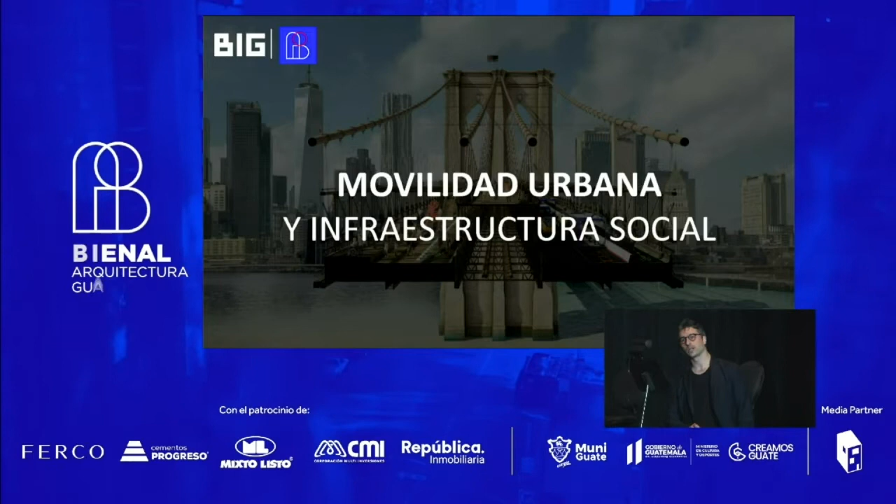My name is Jeremy Siegel. I'm with Big out of New York City, and it's really my pleasure to be here. There's nothing I love more than experiencing and learning about new cities, so it's wonderful to be here in Guatemala City. I had some time this afternoon to spend with the team from the Alcaldía to learn about some of the thinking and initiatives going on here, which are quite exciting.

I'm very happy to present today on urban mobility, which is a theme that's very near and dear to my heart and to Big's heart. The more I look at cities, the more I go to cities that work and cities that don't, it becomes clear that mobility is both a key driver of success and a key indicator of success or lack thereof. Reducing the amount of time we spend in cars is good for economies, good for the environment, and good for people. So I am pleased this evening to share a series of projects which address urban mobility, either as a focus or as part of their agendas.

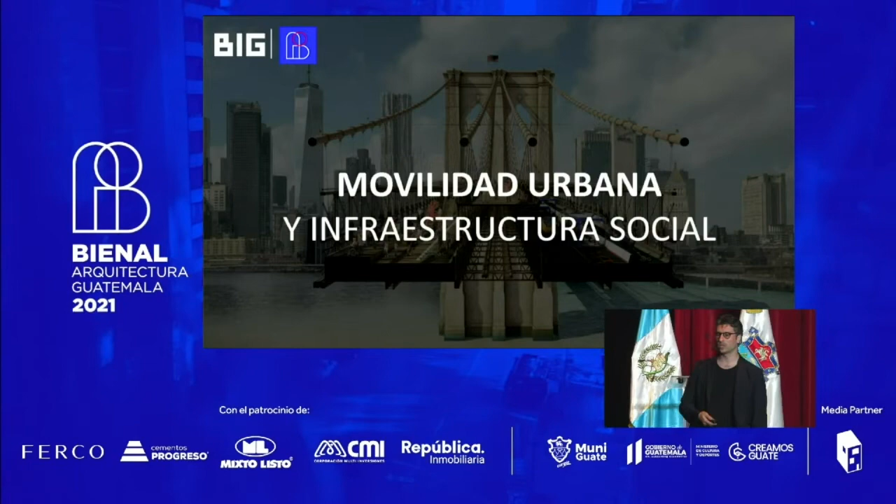I'll also talk about this idea of social infrastructure, which is a way in which we approach many of our projects around the world.

We have a dedicated and passionate workforce, and we like to experiment. We really like to push the boundaries with every project and try to explore what hasn't been done yet.

Recently we've become more of a multidisciplinary office, what we call the Big Leap. So we are architects, but also landscape designers, engineers, urban planners, and even product designers. We work at a whole range of scales, from light bulbs and sofas to parks and buildings to city and regional plans.

Just a little introduction to Big to give you a sense of where we come from and the kind of experience that has informed our more recent projects.

The Harbor Bath was one of our first projects in Copenhagen, built on the occasion of the harbor becoming so clean that you could swim in it. This has become a major attraction in the center of Copenhagen.

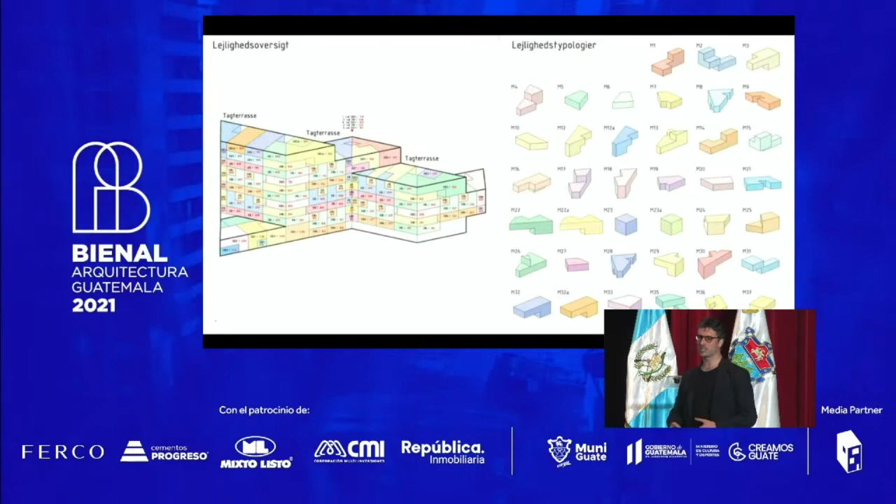Early housing projects like the VM House and the Mountain next door tested the boundaries of individuality and customization within a building, using standard components but trying to generate diversity and community in a surprising way.

The 8 House, another early project, looked at how to create community in a high-density mixed-use development. We wrapped the street and the countryside into the building itself, creating a three-dimensional village where many apartments have their own front door, with a sense of community and neighborhood that's unique and hard to find in those kinds of settings.

Some other experiments with housing: the Urban Rigger, looking at modular prefabrication to produce affordable housing. This is student housing being built in Copenhagen on the harbor, also creating community within the building with a central courtyard.

There's a series of 3 one-bedrooms at the ground floor of each of these and 9 studios up top. The studios are about 30 square meters apiece and the one-bedrooms are about 60. Again, with quite modest effort, creating a lot of quality and value. We're also looking at mass production—these are being built in Poland and then tugged into place in Copenhagen.

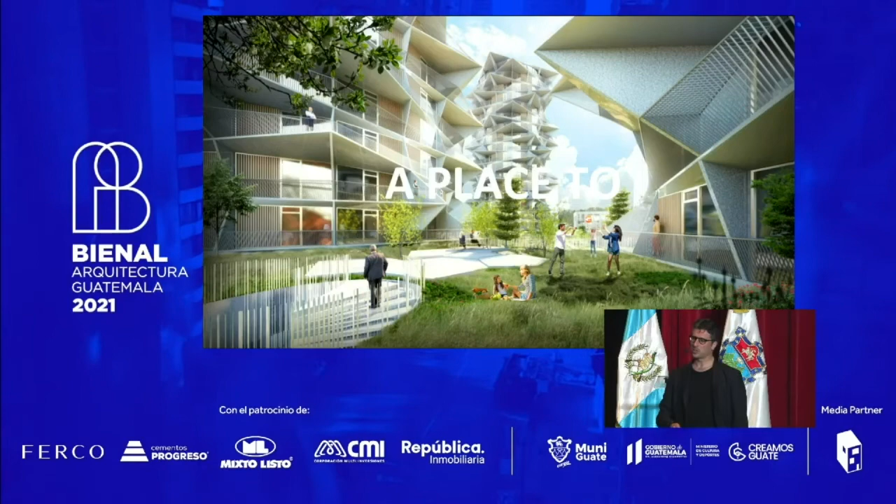Another experiment, a place in Denmark, looking at prefabricated modular cores and slabs with unitized balconies and units attached to those cores that create some pretty interesting architectural effects

and a feeling of community within. Superkilen is one of our earlier planning and public space projects, working in a neighborhood that's actually the most diverse in Copenhagen, with over 60 nationalities represented.

So rather than design the whole park ourselves, we crowdsourced the design out to the community. We created a platform whereby community members could suggest pieces of urban furniture from the places they were originally from. They were all entered online, and eventually the winners were ordered and placed in the park.

So we have fountains from Morocco, a sound system from Jamaica, a boxing ring from Thailand, a bus stop from Kazakhstan, a plaything from Japan, benches from Mexico, and so on—community engagement taken to an extreme, you could say.

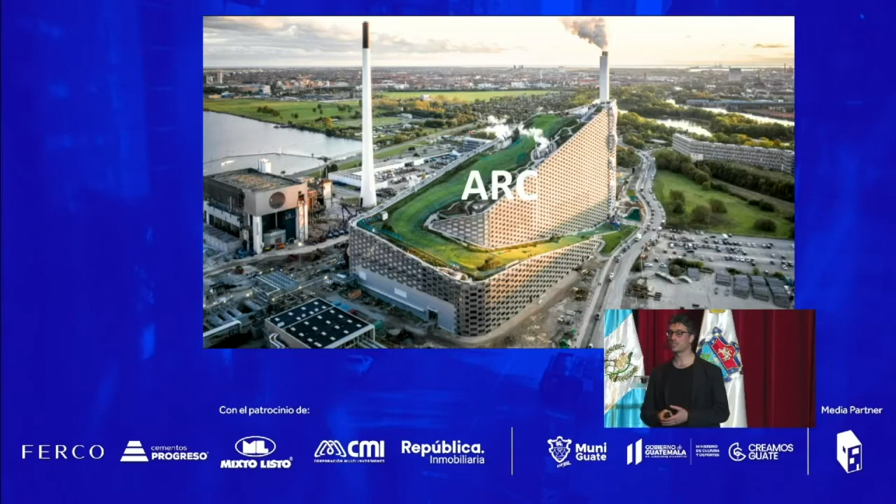And then finally, with the Amager Resource Center in Copenhagen, we won the competition to beautify a waste-to-energy plant, which processes all of Copenhagen's waste and turns it into energy with a byproduct of some steam and CO2.

But rather than just create a pretty facade, we noted that this structure would be the tallest structure in Copenhagen, a place that has a lot of snow but no mountains. So we proposed a ski slope on top of it, and won.

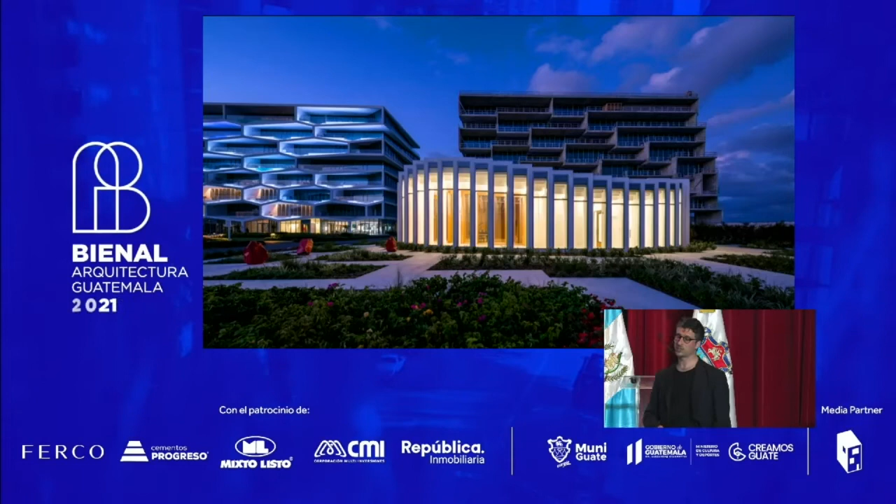We've also started doing more work in Central and South America. A few of our first projects: a residential quarter and recording studio in the Bahamas, where I think Drake recorded his latest album or parts of it, and this is a residence in Mexico.

A few high-rise residential projects in Quito, Ecuador, that we're quite excited about. This one, IQON, is the first one that's going to be built. It's a series of balconies that each have a tree and a space for planting, and you can see the modules of the facade adapt to accommodate the soil depth for those trees.

This is also nearing completion. We're really excited about this one.

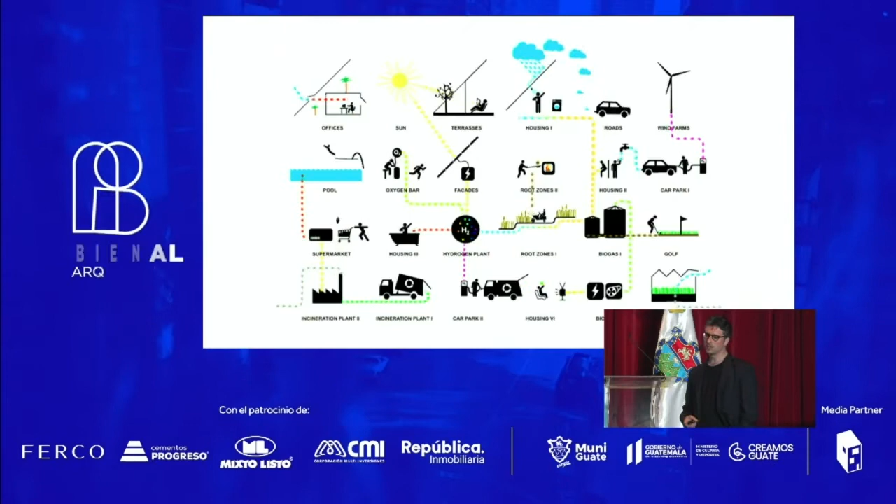Our approach to infrastructure and planning is embedded in our approach to buildings, which is, I think, what we're always trying to do: add additional agendas to the agenda of a given brief or project, and try to create projects and investments that accomplish multiple goals and think comprehensively across the systems of the city.

One of the first large-scale examples of this is a project I've been working on for almost a decade, about 8 years. The Big U in New York City, where after Hurricane Sandy, a federal competition asked us to rethink our cities in light of storm surge and the increasing threats that cities on the eastern seaboard are facing.

So we focused on Lower Manhattan, an area that was dubbed South of Power just after the event. If you look at that area, you'll see that the original coastline was actually about 50% further inland. There's been a program of land reclamation over the last 400 years or so, started with the Dutch, continued by the British, and even continued a bit into the 20th century, where the landmass of the island has increased and economic activity has been able to concentrate around the harbor as a result, which has been great.

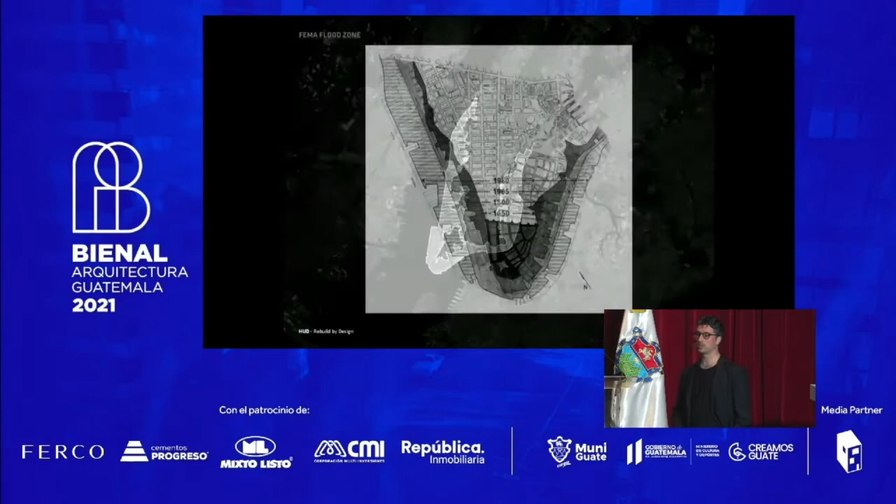But the downside is that all of that land has been built at a quite low elevation. So as we have more and more storms coming into New York Harbor, we're basically going to need to do something about it.

North of 57th and 42nd Streets, the topography is very high, so it's not an issue. So the need in Lower Manhattan is to build some form of an elevated edge to protect against future storm surges. Our approach was to say that if it's approached in a purely functional engineering way, we would create another kind of urban disaster, which would be the cutting off of the city from the waterfront.

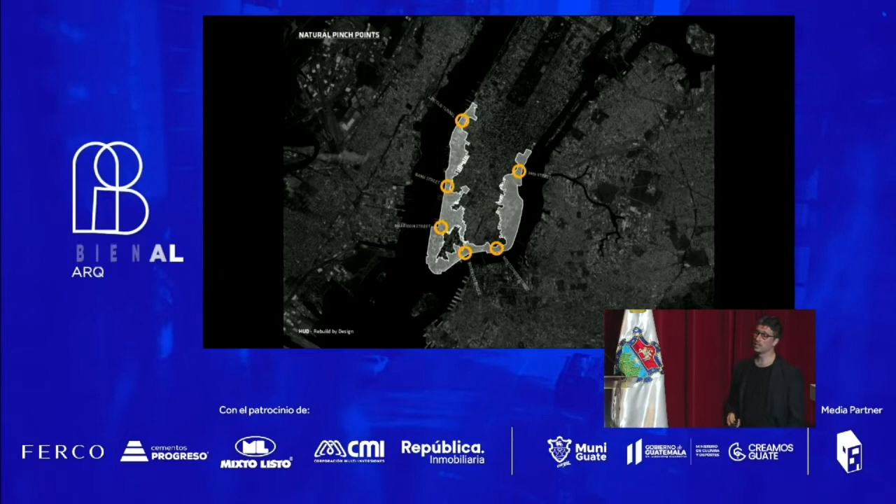So we looked to the High Line, which is a piece of social infrastructure, a train viaduct that was, after the fact, programmed as a park, and in quite a narrow footprint creates a great amenity for Chelsea. We were wondering how we could do this ourselves with the resiliency infrastructure in New York City, how we could work with the scale and also the diversity and variety of the communities that sit along this coastline, and how we can also work with the floodplain.

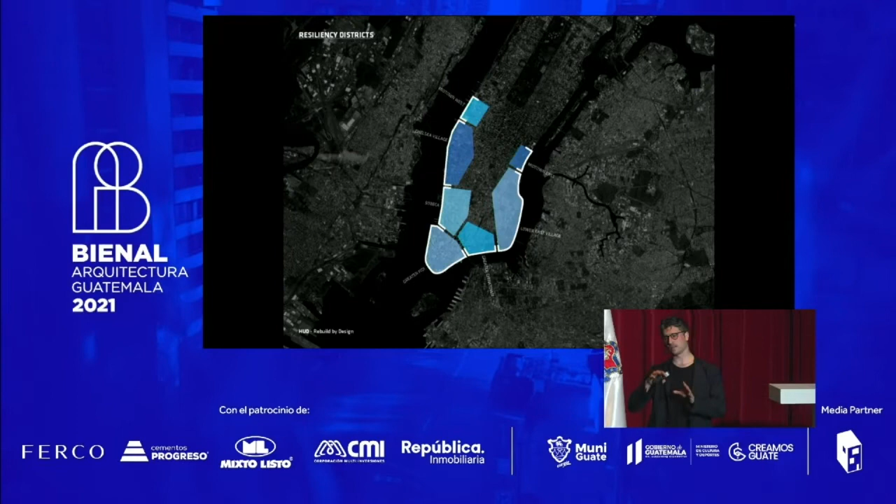The notion of doing 10 miles of continuous protection all in one go is daunting, difficult financially, difficult politically. So we realized quite early on that by breaking up the system of the big U into a series of little U's, we could start smaller and work our way around the island. Each of these compartments, as we call them, could be financed, administrated, and designed at the appropriate time with the appropriate stakeholders. That way we're doing two things: creating redundancy, so if one compartment were to fail, the system would still work overall, but also creating variety along this length, which is a real series of very diverse neighborhoods.

For those of you familiar with urban planning in New York City, we thought of this as a scenario where Robert Moses, the central planner of New York in the 20th century, and Jane Jacobs, his neighborhood activist nemesis who killed many of his projects, were to collaborate together on a project.

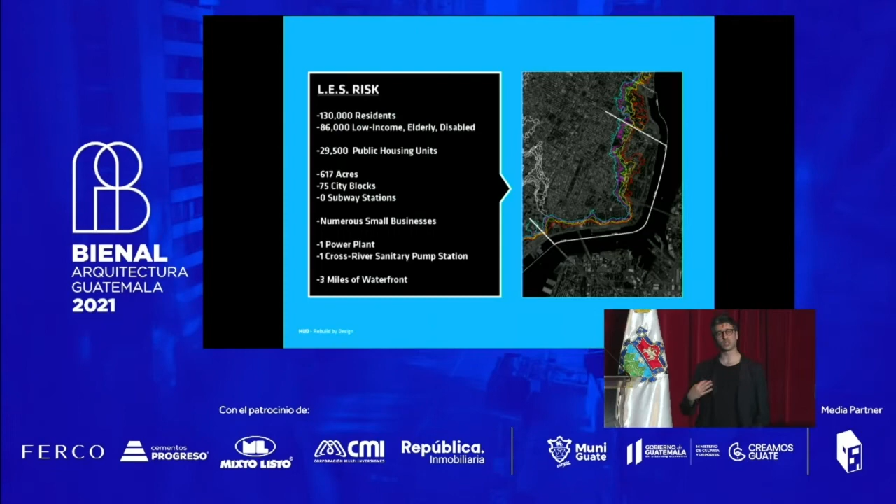To do that, for the Jane Jacobs part of it, we had to understand who was living along this coastline, what all the relevant stakeholders were, both on the nonprofit and community side, but also government, federal, state, and local, as well as the private sector and businesses. Through a series of briefings, meetings, and workshops, we met with everyone. We slowly started to zero in on the Lower East Side as a place to start. It's a place with a lot of social vulnerability, 130,000 residents, 86,000 of whom are low-income, elderly, or disabled, living in about 30,000 public housing units.

Working with local community groups, we began to craft a plan. One big innovation for us, since we were an independent entity, is we were able to approach the community with an openness and transparency that perhaps isn't so normal in New York City planning, where a lot of things are kept closer to the chest. So we made architectural models of all the various options for flood protection, from narrow footprint flood walls to programmed parks and even buried highways and more involved efforts. Over a series of workshops, we zeroed in on solutions for each part of the waterfront, and we found these to be a really great way of engaging with people.

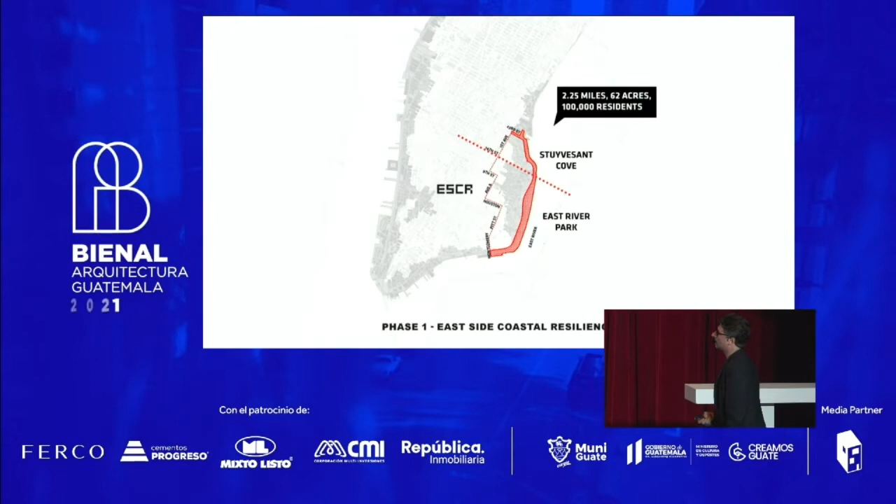After that whole effort, our project was awarded first place of $335 million to implement phase one. It's pretty rare that you get the governor, the senior senator, and the mayor all on one stage, so it was a great moment. Then we proceeded with the first phase, East Side Coastal Resiliency, which will be 62 acres and about $1.5 billion, about 8 years of construction — a sense of scale with respect to Central Park and the High Line.

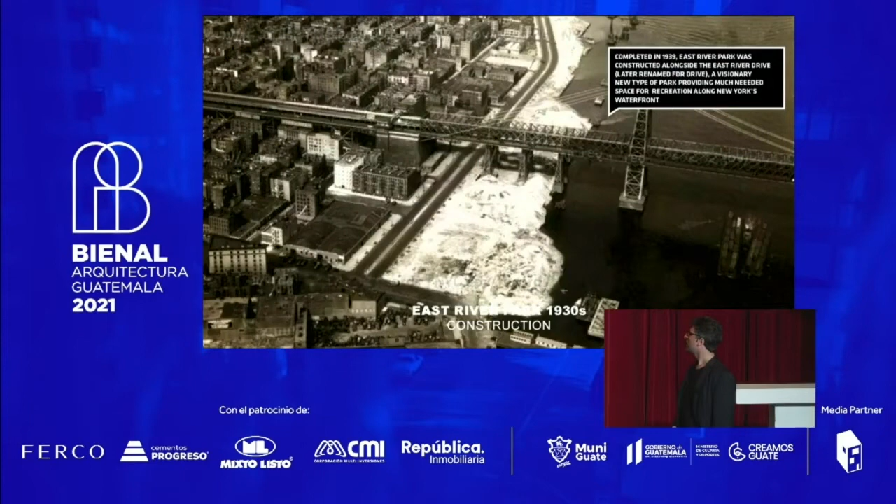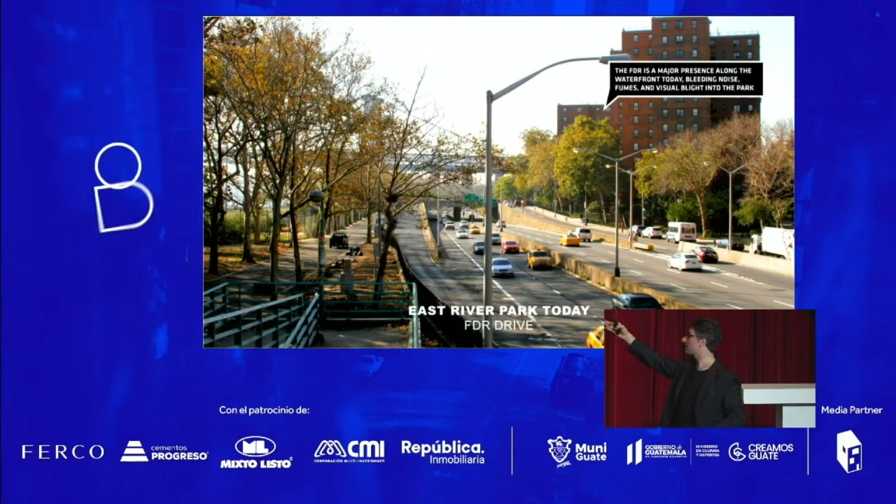Here's where urban mobility comes in. Lower East Side used to be a working waterfront with a series of piers and very dense tenements — one of the densest places in the entire country and maybe the world at the time. In the 1930s, an at-grade boulevard was created, and a park was created outboard by Robert Moses. In the 1950s, as car culture became the norm, the at-grade boulevard, which you could cross easily, was turned into an expressway. Today, that expressway cuts the neighborhood off from the waterfront, with only 5 points of access across about 2 miles. The bridges are the same ones originally built, so substandard crossings. And the Manhattan Greenway here can use some work — this is one of the major north-south arteries.

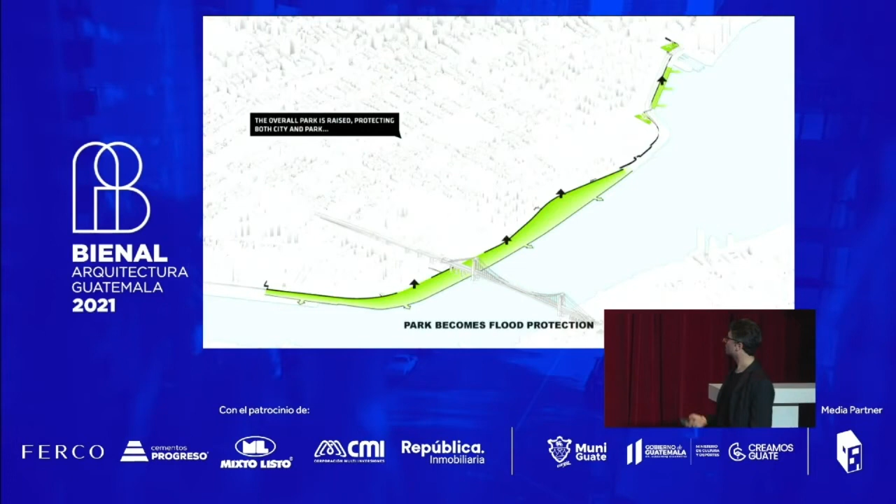You can get a sense of scale there for how deep it goes in. So the flood protection runs along this length, then the park is elevated to meet that elevation.

A series of key programs are preserved and lifted up and rebuilt in place, and then a series of passive recreation areas are placed between those. New bridges, and this is a really key feature, new pedestrian bridges will bridge across the FDR Drive into the neighborhood, so a seamless circulation system is created.

The Manhattan Greenway is enhanced and gives access to a number of programmed areas, which we worked with the community to identify what made sense where.

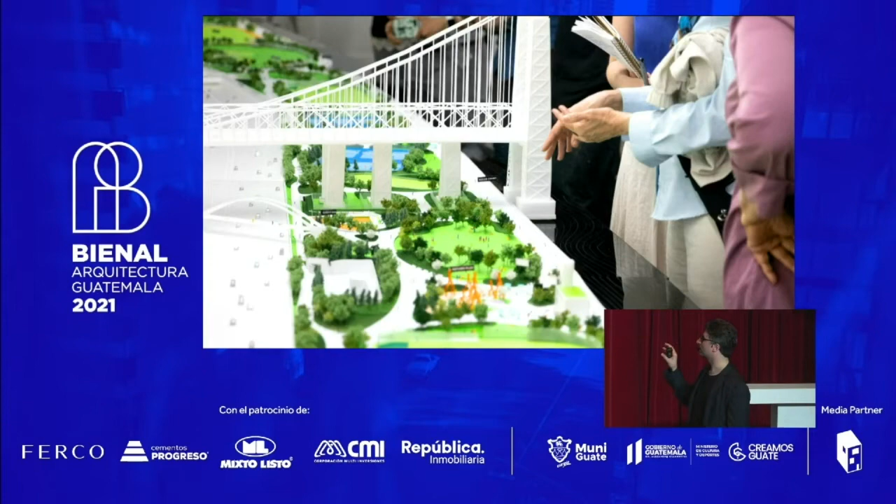So this gives you a sense of what will be built. This is a bridge at Delancey Street, framing into the park. Three new bridges over the FDR, and a series of amenities along the length.

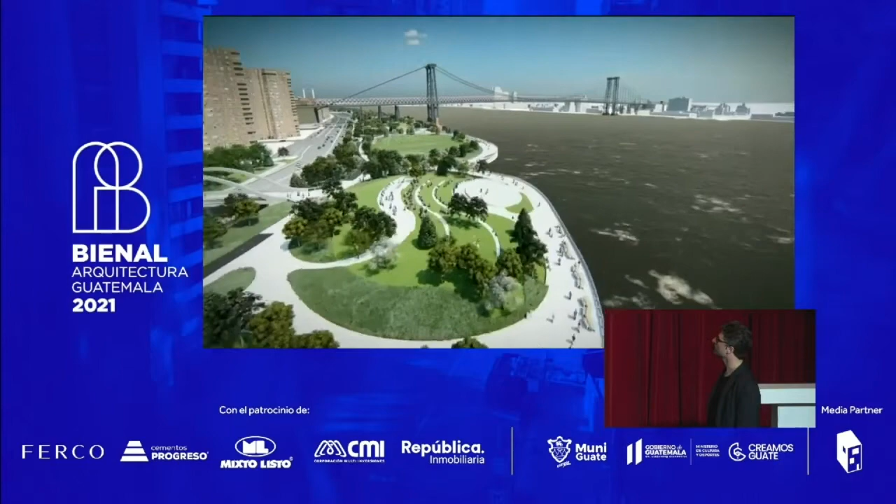So this gives you a little bit of a 3-dimensional sense of the project. You can see the flood wall there towards the back, the Greenway, one of the first bridges, and it's sort of changing along its length and accommodating various activities.

This is under construction. This is the first piece of the flood wall, built in situ in cast concrete. You can see a guy there for scale. So this is striated at every foot.

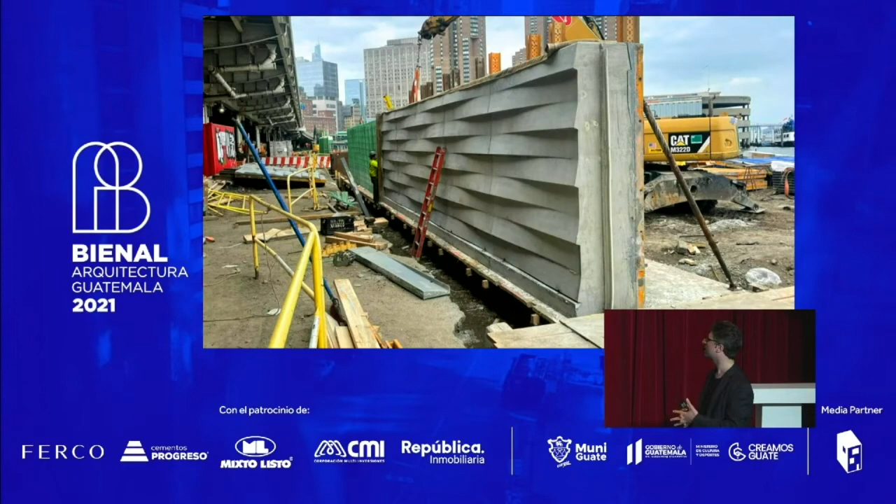And we worked really hard to find an approach where we could have a concrete wall that was inspectable by the relevant authorities, but that had a sense of scale and playfulness to it.

This is BQ Park in Brooklyn, where another Robert Moses project, the BQE Triple Cantilever, was built in the 1950s. Kind of an amazing feat of engineering that has a wonderful park on top of it. You can see the promenade up there.

But the lower portions of it are corroding. The steel reinforcement is corroding. And it's very dire — by 2026, the whole thing could collapse, if not sooner.

The problem is that there's a much-loved park on top of it. This is one of my neighborhood parks, the Brooklyn Heights Promenade. And the city of New York, their original proposal for this area was to build a 6-lane highway.

A temporary 6-lane highway through this park, working only within their own right-of-way, their own jurisdiction, to do this. For them, that was a benefit.

So we looked at the historic urban fabric of Brooklyn and the original condition where there was a more seamless interlacing of city and river. And we also took a look at the real physical conditions that we have on site.

Looking at it, I would say, more as designers than as planners, in the sense that we tend not to see jurisdictional boundaries so much. So what we realized was that the back of the park, with its berm and parking, is really there as a buffer for all of the noise and visual pollution of the highway.

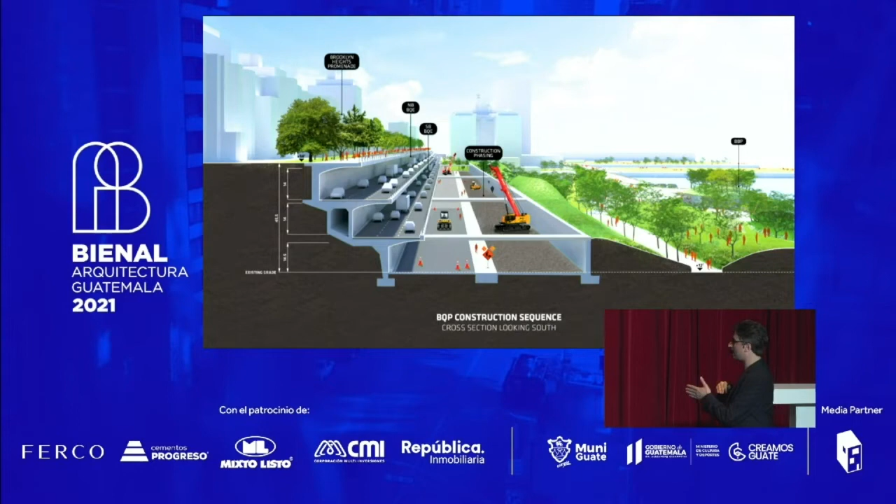And that if the city, which owned everything up until the sidewalk, could coordinate with the state, which controlled the park, a joint solution could be made where the highway would actually be built at ground level using a piece of the park. But eventually, after construction — and you could also construct the highway while the existing highway was operating — additional park could be placed on top, and you would get a net gain of about 12 acres of parkland.

There was a lot of engineering and traffic planning that had to go into this — understanding how the phasing would work, how various lanes would be shut down, switched over, and eventually capped over. This was actually a pro bono effort, so we worked with a team of engineers from New York who were also passionate about this.

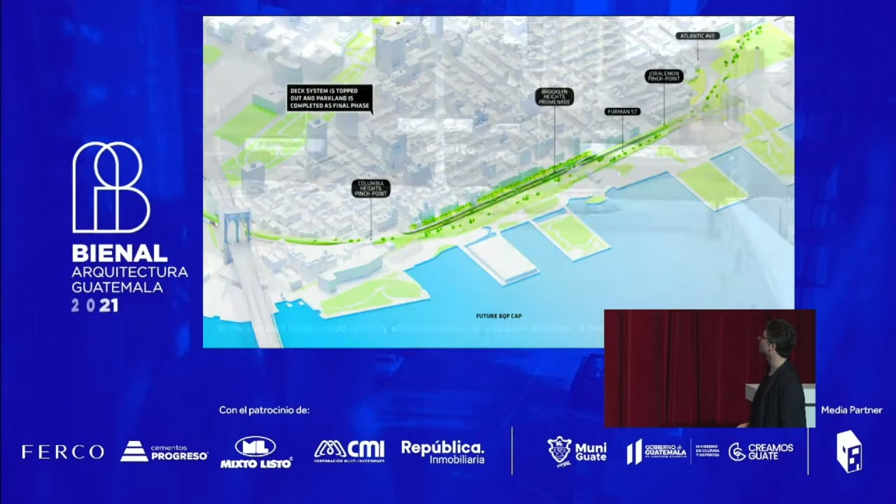And we also worked with the landscape designers of Brooklyn Bridge Park to imagine what the park would be like with the highway covered and capped. So, a much smoother connection up to the neighborhood, a much smoother connection down to the park from the neighborhood, additional space for programming, and in some places, really radical changes.

So in this case, at this point, the highway would actually be below ground. So you would have just a complete transformation of this access way to the park.

It wasn't enough just to put the big idea out there. In order to prove out the idea, we had to address each and every one of these issues, which were brought up by all the various naysayers about the project.

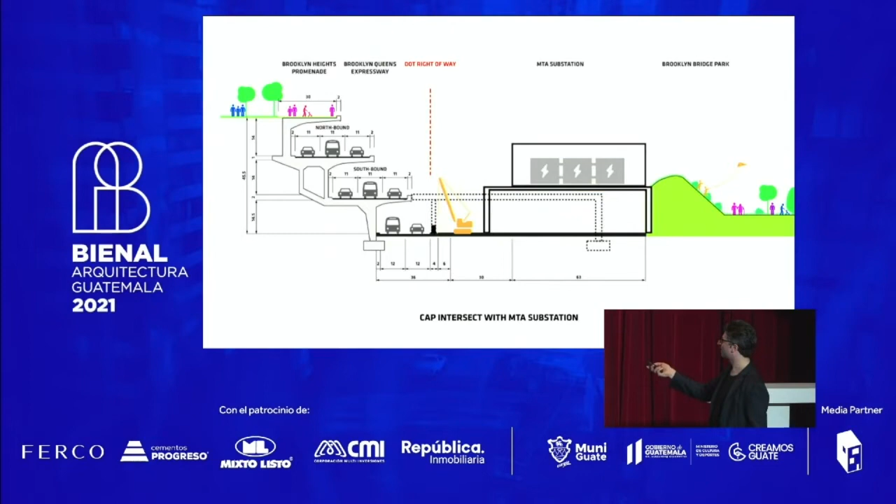We met with the MTA and figured out how to deal with the nitty-gritty of the substations, meeting with their chief electrical engineers. We figured out a way to build a temporary, or basically build a new electrical substation above the existing one, and then switch one offline while the other is turning on, and integrate it into the park.

Also looking at complex engineering conditions in these areas. So this is all to say that the big idea is great, but we also take a lot of time to go in depth and understand the technical parameters of the solutions we're proposing.

And of course, engagement again, building off the experience from the Big U, is something we continued here to make sure we're getting buy-in. So we got a number of audiences with the mayor's expert panel formed to look at this problem, and presented at this epic town hall of about 1,200 people in Brooklyn Heights.

After about a year of work, City Council endorsed our proposal as the most feasible and also cheapest solution. So we're now waiting basically for the new mayor, Eric Adams, to decide what to do, but we're hopeful that the advice will be taken.

And we worked with a local animator to produce this vision of what the project would be like, and also what the soundscape would be like. So I'll shut up for a second.

So from the BQ Expressway to BQ Park.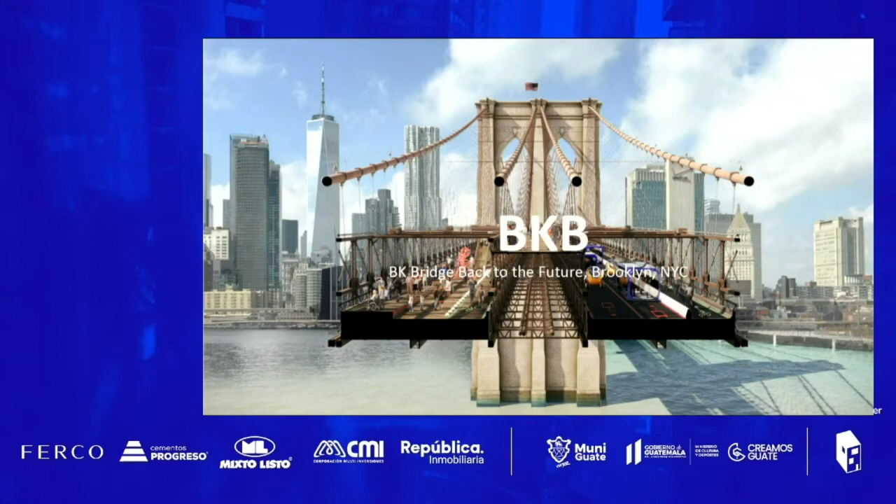And so we've just been on the Brooklyn waterfront and we've been on the Manhattan waterfront. And the thing that connects them is the Brooklyn Bridge, which is a piece of infrastructure we also had the opportunity to look at with New York City Council last summer. This was a really exciting competition where we were asked to think about this historic bridge.

This is a Thomas Edison video, one of the earliest examples of film taken on the streetcar. Actually, this is the heavy rail, so this is a predecessor to the subway that he's on. You can see streetcars to the right.

And the impetus for this competition was that the promenade in the middle of the bridge is chronically overcrowded, or at least it was before COVID. The competition then actually ended up happening during COVID, so it was kind of a funny duality between an empty bridge and a full bridge.

But what COVID and also a lot of the demonstrations that were happening around the same time, around Black Lives Matter and related social issues. Repeatedly, I was in demonstrations like this, which took over streets and somehow said, 'This street is ours now, it's for people.' And there were even bike protests happening all around the city, where giant groups of bikers would wind their way through streets and across bridges.

So you can see here thousands of people walking along the roadway here. And it really became a moment to rethink what the bridge could be.

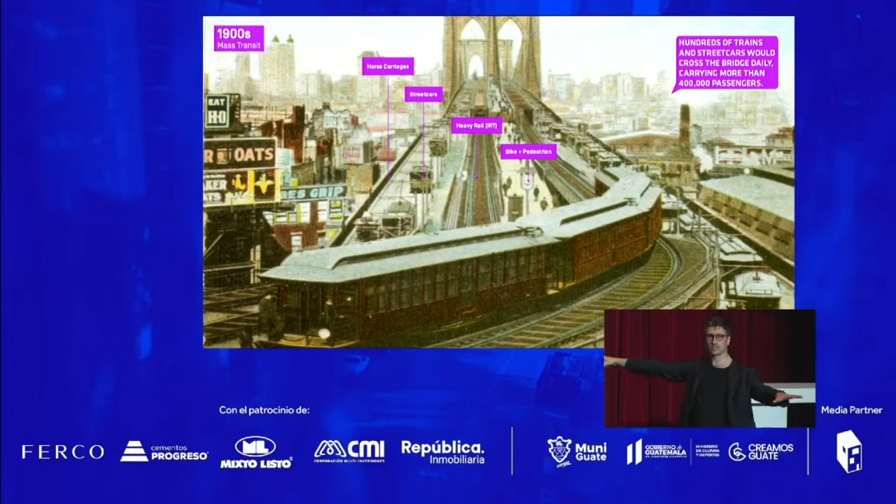As I said, originally there were actually only one lane per direction of the equivalent of a private vehicle, which was the horse carriage, and the horse carriages had to pay a toll. In addition to that, there were streetcars - you can see how many of them there are that fan their way out into the entire city. And then there's heavy rail in the center, which is basically the predecessor to the subway.

And at its peak in the 1900s, when the city's population was 1 or 2 million, this bridge carried 425,000 people a day.

Robert Moses, again a recurring theme in all of this, demolished the streetcar terminals just after World War II to make way for cars. We now have 3 lanes of cars in either direction. And the city, which is now at about 8 million, even though we've had a quadrupling of the city's population, we've had a more than halving of the capacity of the bridge. So the bridge is really good at moving cars. It's very bad at moving people.

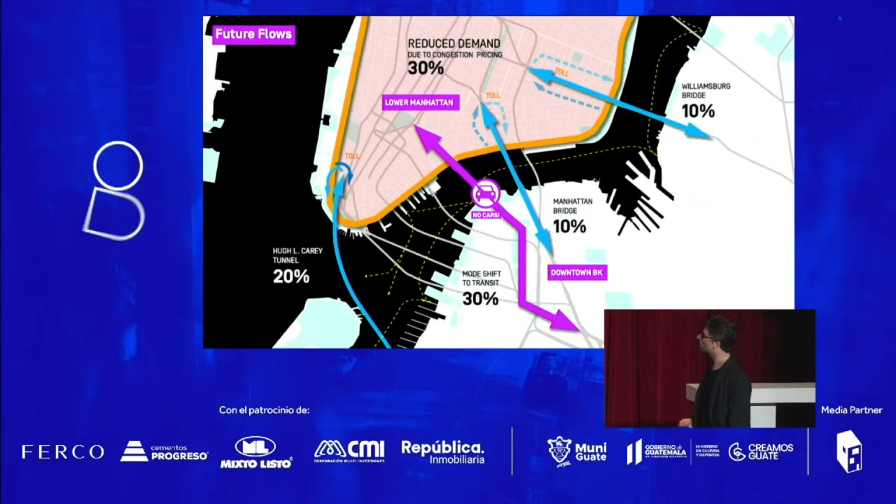And it's bad at moving people on the promenade as well. So for us, we decided to take a bold step and say, what if we removed all cars from this bridge? If so, where could that traffic go?

The Brooklyn Bridge connects downtown Manhattan to downtown Brooklyn, so it is a good candidate for a sort of carless connection. Working with Arup, we were able to identify how the traffic could disperse, and also how congestion pricing, which will start to create tolls to pass through Manhattan, would also reduce demand.

We were also very cognizant of the fact that in Denmark, where Big is from, 40 or 50 years ago the share of cyclists commuting was in the low single digits. Today, the number of commuters who are on bikes is 62% of all commuters. And that's not just a cultural thing that happened through policy and design. There's been a very concerted effort over the last 4 or 5 decades to remove on-street parking, to introduce safe, dedicated bike lanes, and that has led to the great biking city that Copenhagen is today.

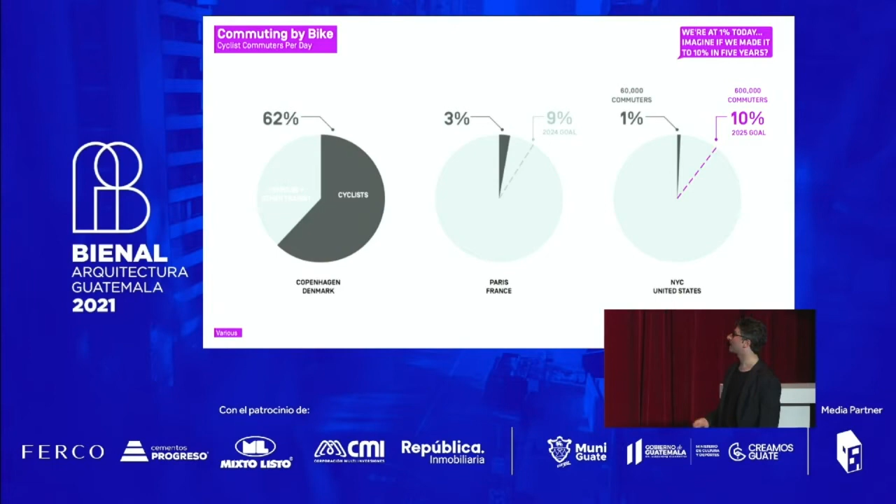So New York has a lot of ways to go, 1% today. So even if we could get to just 10%, 1/6 of Denmark, there's a whole lot more traffic that would be on the roads in terms of bikes.

We knew, though, that we couldn't do this all in one shot, so we looked at a kind of phased approach where initially only a single lane of traffic in either direction would be converted into a bike lane. Over time, on the northern edge, the traffic would be converted to bus only, and a bus service would be run between downtown Brooklyn and downtown Manhattan.

Eventually, the southern portion of the bridge would be converted into a pedestrian-only plaza, a sort of linear plaza through the sky. And the transit corridor could accommodate other forms of mobility, autonomous transit, small electric shuttles, et cetera.

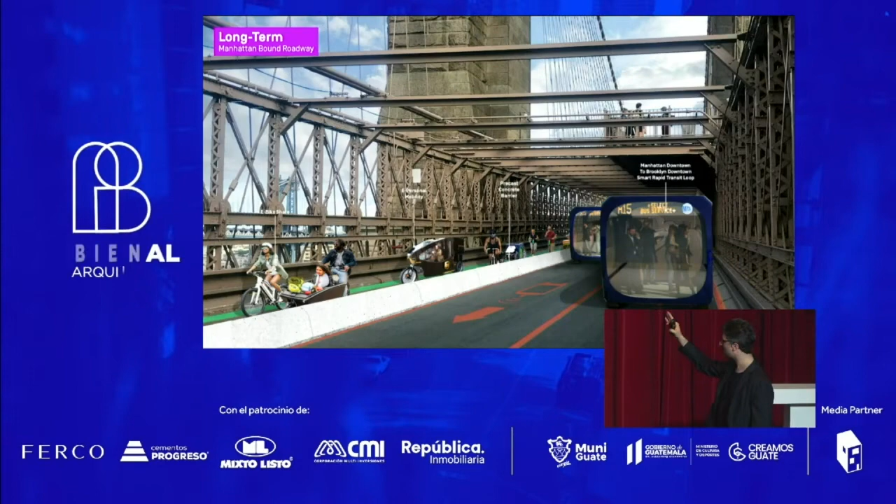So on the northern side, the transit corridor is a very simple intervention, just a median to separate bikes from transit, and then allowing transit to run.

And then on the southern side, with the really epic views out to New York Harbor, in the near term it could be just simple weekend closures, or a more permanent closure with sidewalk painting, food trucks, and movable furniture. And then in the long term, as people became comfortable with the idea and as traffic found its way elsewhere, converting this entire length into a pedestrian plaza.

With all kinds of opportunities over the course of a day or over the course of the year for different kinds of activities.

Another major impact of doing this would be at the bridge abutments. This is where highway viaducts connect the FDR, which we saw in the ESCR project, to the Brooklyn Bridge. So if the Brooklyn Bridge does not have cars on it, none of those viaducts would be necessary.

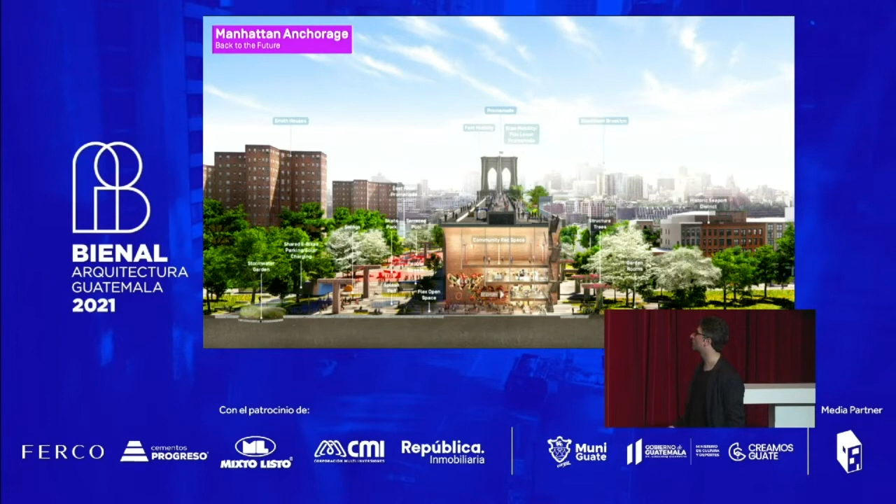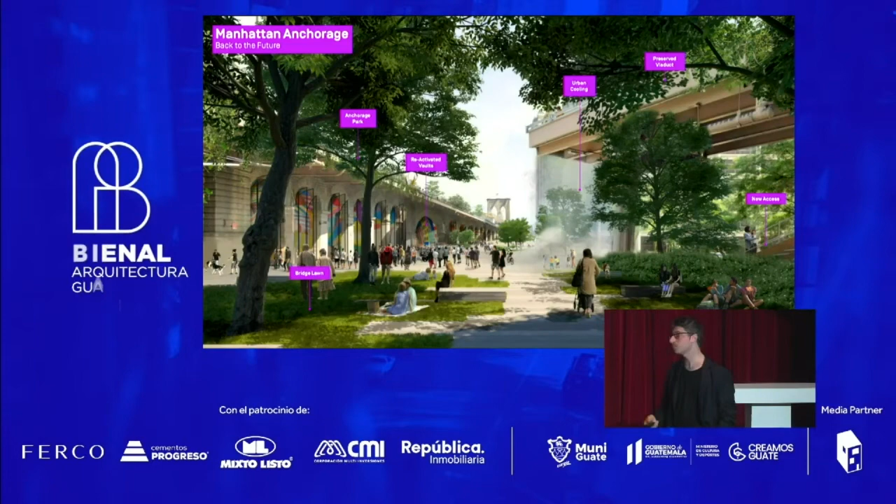In addition to the space on the bridge, a whole series of areas totaling about 35 acres would be made available for parks and open spaces, including the areas underneath the bridge, which could help stitch together these two communities that have been cut off from one another. You can see the barrier that it creates today. And the potential here includes space for urban shade, which we really need as climate change makes our cities hotter, water, commerce, etc.

So the idea was kind of tested on the bridge, but it's an idea that we thought should go much further into New York. Connecting to Broadway, which has already started to be pedestrianized, with bike lanes placed there by the Bloomberg administration, and then to other major corridors in Brooklyn, first connecting out radially to all of the neighborhoods to allow people to get back and forth to the core of jobs.

But then eventually creating a more even grid that allows north-south connections in the outer boroughs, Brooklyn and Queens, which is something the city is sorely lacking today, because most of our subway lines follow a similar radial pattern. So often to get from, say, the southern part of Brooklyn to the northern part of Brooklyn, you actually have to go into Manhattan and back out. So these even grids are something that, as we've been designing new cities, we always look to incorporate. I'll get to that with another project or two.

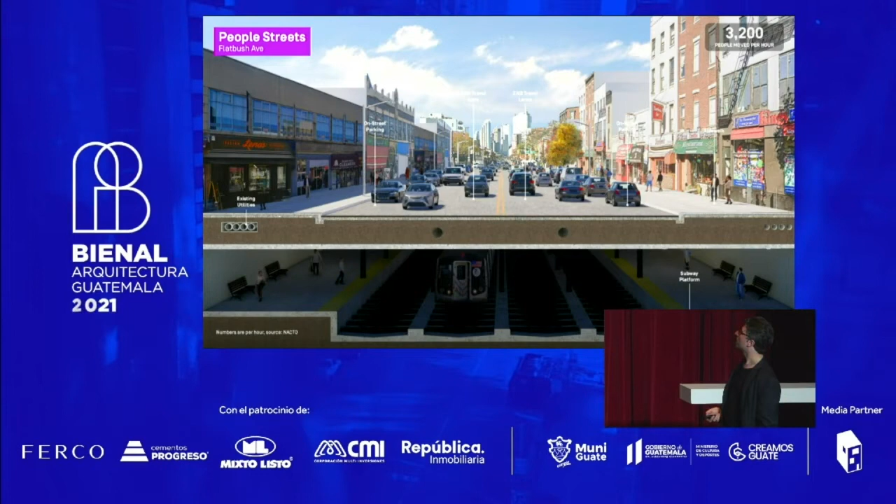And of course, that is going to be happening on existing corridors, so that also has to be phased over time. And in places with not a lot of shade, which is the existing condition today on Flatbush Avenue, shade is a really important component combined with bike paths to keep them comfortable in the heat of the summer, as climate change makes cities hotter, and eventually turning over other lanes to other kinds of vehicles. There's a whole host of benefits that come with this, from better mental health through better walkability, reduction of pollution in the air with trees, better handling of stormwater, and even better activation of commerce through more biking and walking.

With this one, we're very pleased that in the last few months, the city took the advice of the project and created the first lane closure here on the northern side. It's a 2-lane one right now, but we're hopeful that the equivalent on the other side will also soon be put into place. So that's working within an existing context.

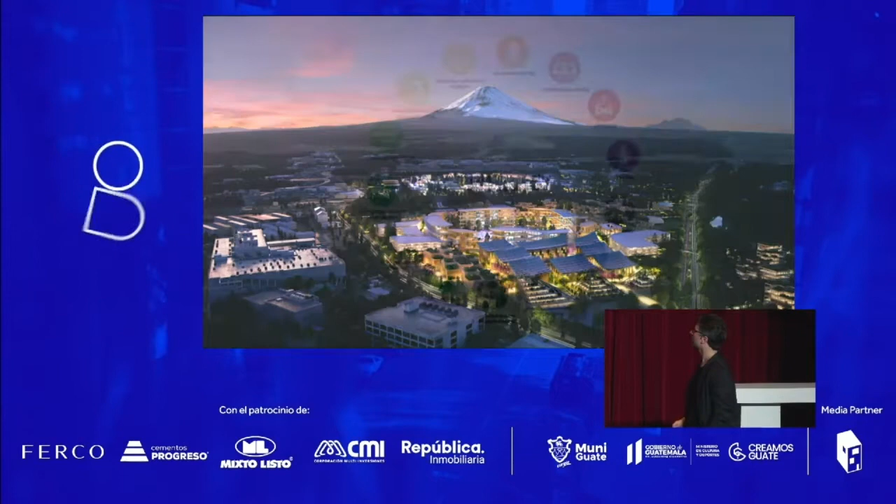I'm going to move on now to a few projects where we've been working in a new context, able to think about the ideas we've developed in existing cities and work with more of a blank slate. This is work we've been doing for Toyota. They're on their campus at the base of Mount Fuji in Japan. They wanted to create a city that would be opened within this decade that would become a living laboratory for a whole series of technologies they're working on in-house. So mobility was obviously a key driver here.

Our first observation was that people, bikes, e-bikes, scooters, and vehicles travel all at different speeds, and yet we tend to cluster them in the same street condition where conflicts basically occur.

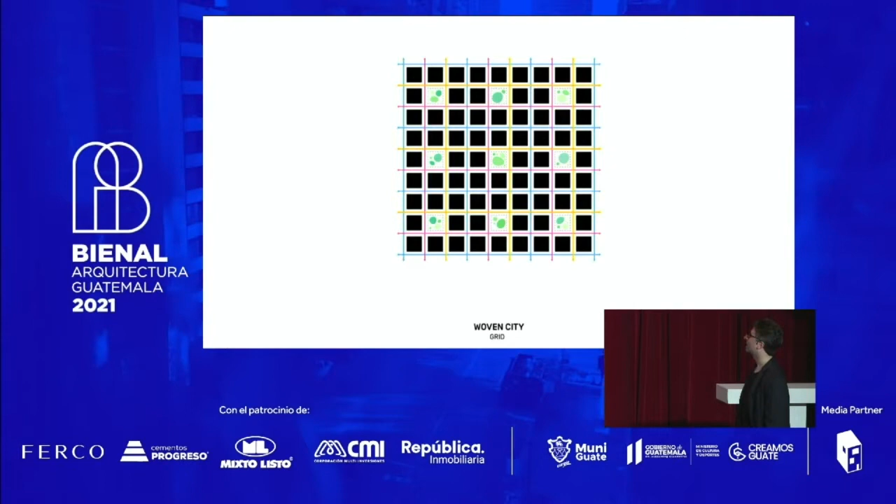So the idea here with the Woven City, which Toyota actually ended up copyrighting because they liked the name so much, is to separate these kinds of streets and create a series of different streets that weave together, almost like a plaid pattern, to create a different kind of city where faster access is in blue on the exterior, medium speed access happens in the pink, and slower speed walking and biking happens in the yellow. This can multiply and distort to accommodate different kinds of open spaces, and it formed the basis for our master plan for the area.

This gives you a little view of how that concept might work, if it'll come up. Here we go. A little bit glitchy. Let's see if it fixes itself.

So it's about a series of different kinds of streets, some optimized for autonomous vehicles, like the one you saw a few seconds ago. This is a walking and biking path.

Oops, that's very glitchy. But creating a kind of street that you don't really think of as a street normally. Let's see if this will work.

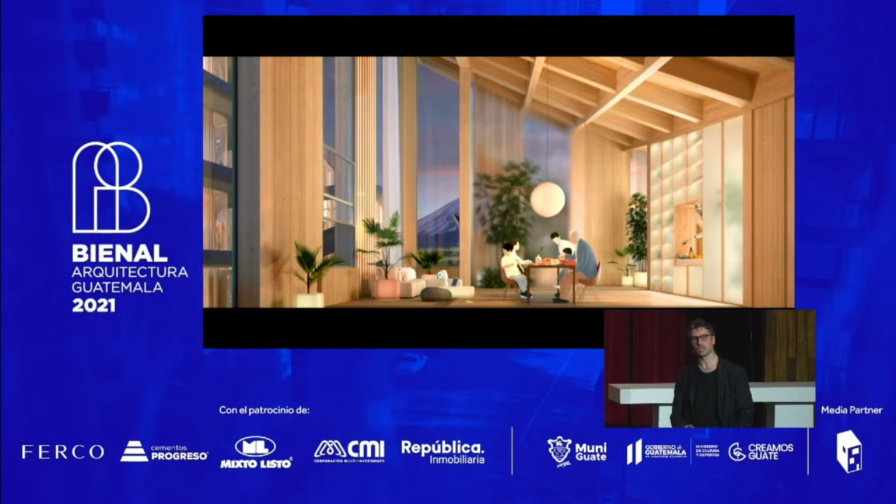So beneath the Woven City, there's another network of mobility for logistics, goods and waste, which have access to units. In this case, bringing dinner up to a family. Also, you can imagine being able to store objects you only use every month or every year somewhere further away, reducing the amount of space you need in your own apartment and having storage somewhere else.

And then also integrating autonomous vehicles with the architecture of the city, allowing for kind of door-to-door, point-to-point connections.

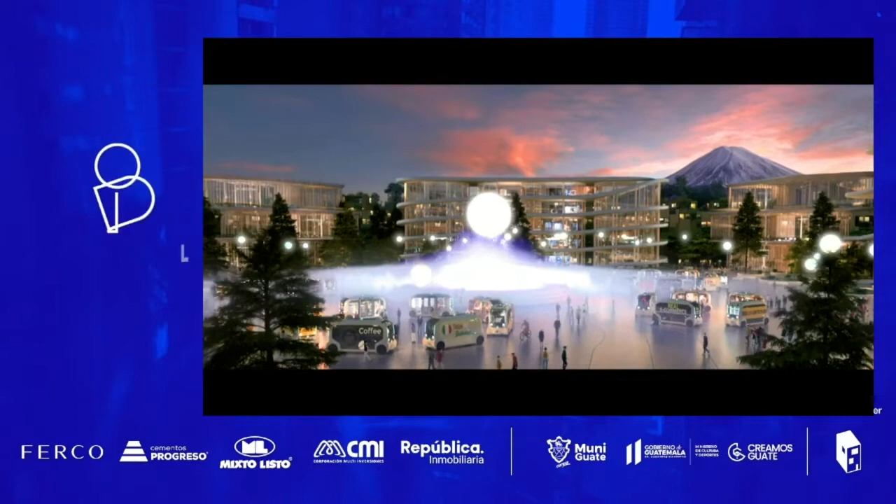So a bit more of a futuristic take, but one that Toyota is actually very serious about. Akio Toyoda presented this together with Bjarke at the big automotive conference in 2020. Some on-site preparation is happening right now, and we expect that we should be seeing some of this very soon. There's Akio unveiling it, and more to come.

I spent a good part of the last year living in Malaysia, working on this project, which was a competition that we won. I'd say because of COVID, we were working on this competition in the depth of the lockdown, and we had nothing better to do than design this city. So we worked really hard on it, and eventually won.

This is for the extension of an island called Penang, which is the second largest city, a bit of a city-state, in Malaysia, at what we call the crossroads of the world. These are all the shipping lanes in the world, and Malaysia has this real cultural diversity that comes from all of the different cultures that have met here for many centuries, as well as biological diversity, being one of the 17 most biodiverse places on the planet.

So our proposal, we called BiodiverCity. It basically consists of a series of 3 islands, which will total about 500,000 residents. For reference, the island itself is about 1 million residents in an area about the same size as Manhattan, in that third of it there.

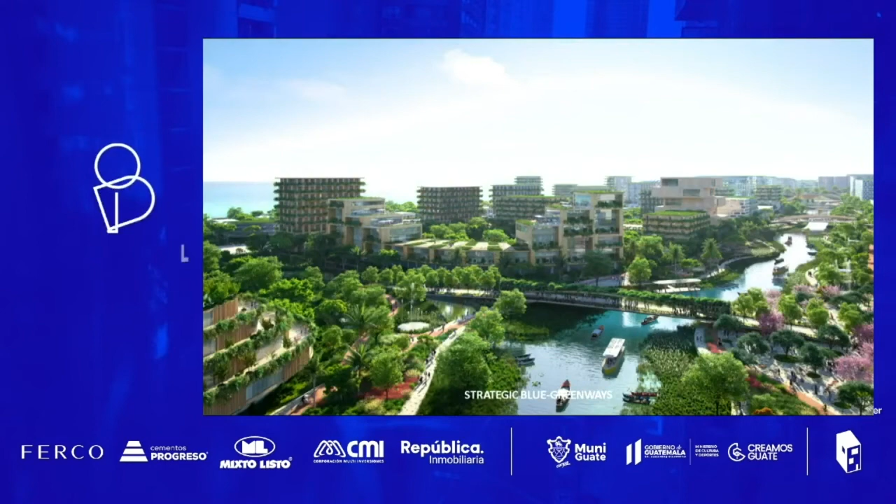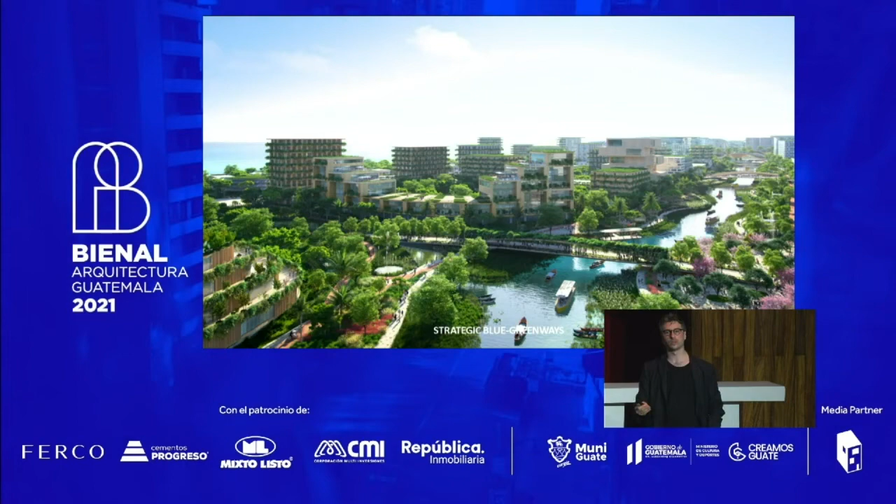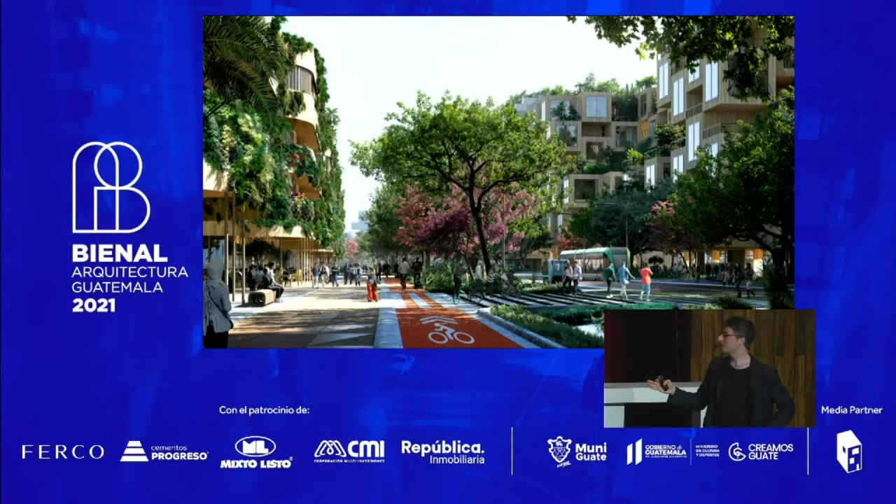In addition, we have an on-street network of bikeways. This isn't just a pretty picture—it's a very labored-over cross-section of a city street where we had to work out where all the utilities go, because we're not allowed to put utilities underneath roadways in Malaysia. We had to understand what utility could go under what surface area. We have a minimum 6 meters for fire access, dedicated bike lanes shaded by 2.5 to 5 meter wide swales, and bus rapid transit that actually runs on tires—it looks like a train, but it's just on tires. We're also encouraging, through the urban design guidelines, zero lot line development where you get eyes on the street, a feeling of security and safety that promotes walking and biking, which feeds back into the modal split and the carbon footprint of the project.

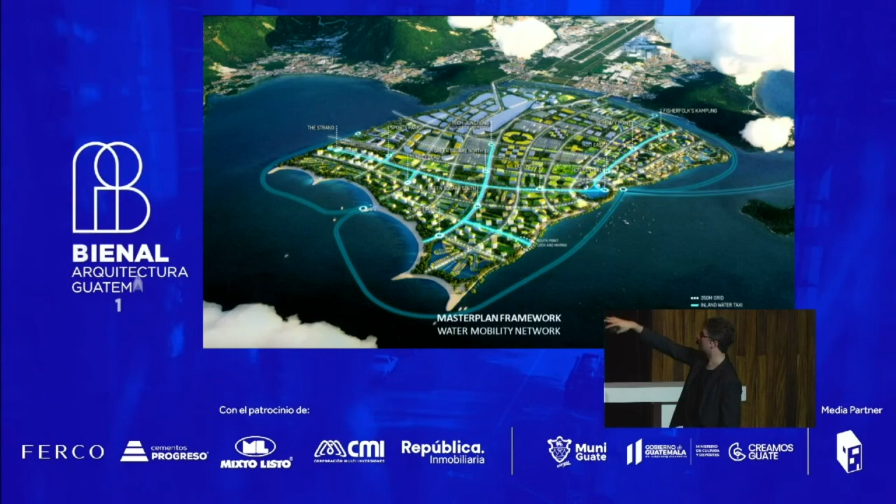Having a bike share is really important, co-locating it at intermodal hubs like train stations. There's also a ferry network working both inside the freshwater network of the island and the saltwater ferry coming from existing Georgetown.

There's also a bus and rail network. We're creating intermodal hubs between all these networks so that if you come into the island on the LRT train, you can get off at a station and go down directly to the bus rapid transit, which might take you to another stop where you get on a bike and take it on the superhighway. You can also go straight from the LRT station to the water taxi if you choose—really trying to create seamless connections between different forms of transit.

Through this project, we were required to meet the Low Carbon Cities Framework for Malaysia, which as a baseline requires a 40% reduction of carbon footprint over a typical development of the same size. So through primarily our mobility network, we were able to reduce the carbon footprint of the project by 40%.

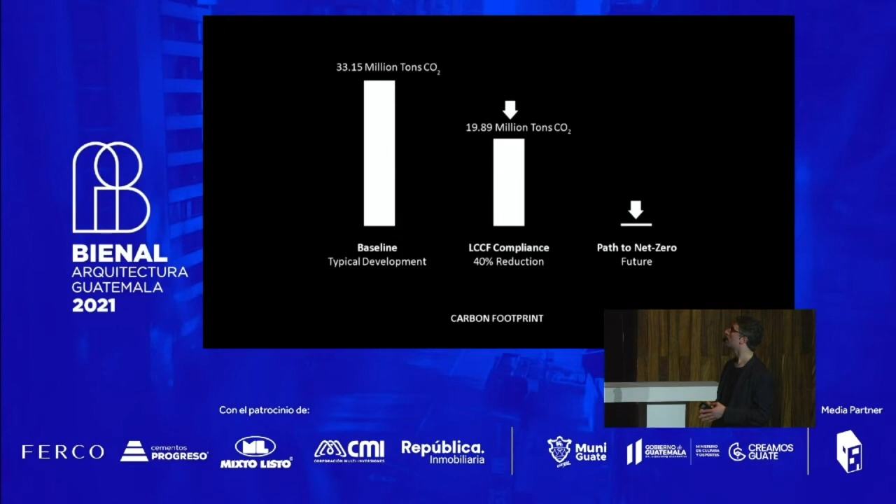If you've read Bill Gates' latest book, you'll know that 40% isn't going to cut it. So we have to get to net zero eventually. But it is a big step, particularly in a developing context like Malaysia.

And then, of course, in addition to all of this utilitarian planning, we're looking at how to create amazing places, a very green city, one with a lot of amenity along its banks, the banks of its waterways, where we're able to replant and nurture mangroves, which each mangrove tree sequesters about 6 times as much carbon as a typical land-based tree. And a city that has certain qualities that are driven by all of these very rational planning steps we've taken.

Another context we've been working in, which is both a combination of working within an existing city and working in a totally tabula rasa context, is in Barranquilla in Colombia, which sits on the Caribbean coast. It's also called the Puerta de Oro, the gateway to South America. It's a bit like New York City in the sense that it sits at the intersection of a major river with the ocean.

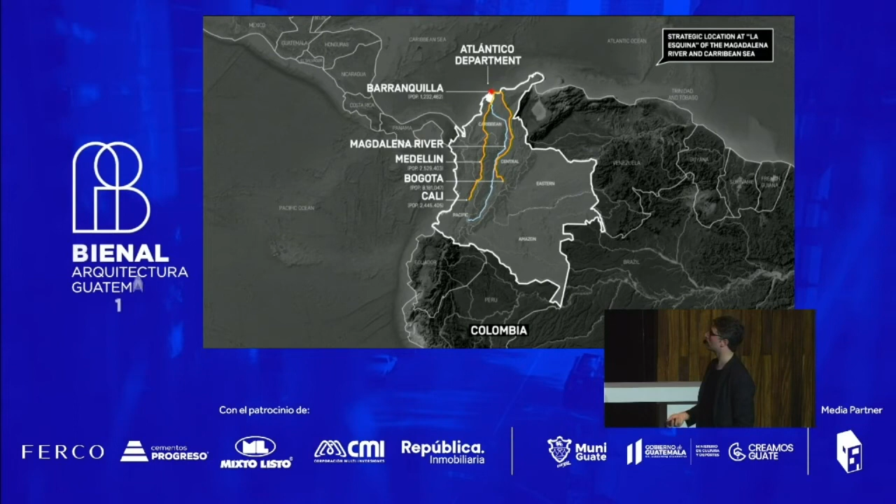And you'll note that it's separated from the historic heart of Colombia, and that's both been its weakness through much of the 20th century, but I think it's also its strength now in that it has a certain sense of independence and innovation.

So we were asked by the government and the governor of Atlántico to basically look at how the city might be growing in the future.

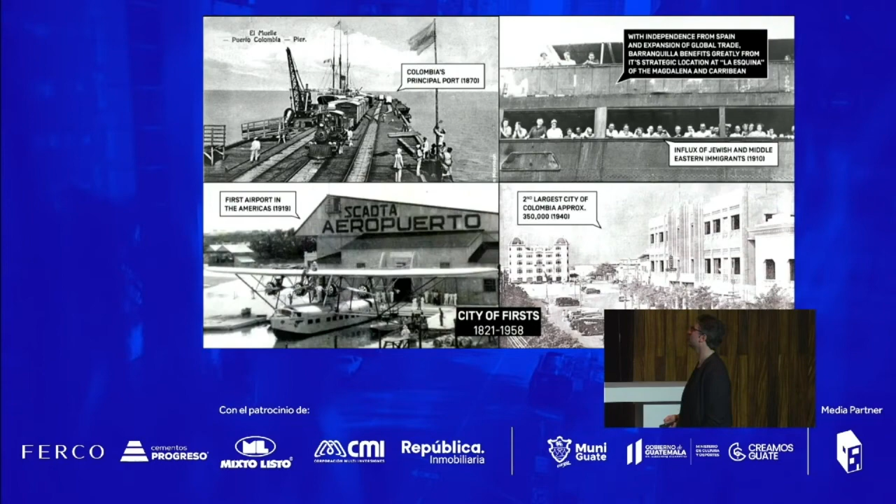The city itself is a place that has kind of been bustling in the early 20th century. A lot of immigration, including Middle Eastern immigrants. Shakira is from Barranquilla, and her name reflects that mixing. The city kind of turned very much inward and had a more domestic focus in the late 20th century. But today, it's globalizing and it's growing. And so the governor very rightly wanted to figure out what to do about that.

If you look at the historic growth of the city spatially, you see that from 1821 to 1958, 1991, 1999, even 2011, the basic boundary of the city has not changed so much. There's been sort of an invisible wall that's been created by the lack of security in the countryside. But if you look in just the last 8 years, the growth of the city has started to explode, primarily along, coming back to urban mobility, along these arterial roads that are moving out from the center of the city.

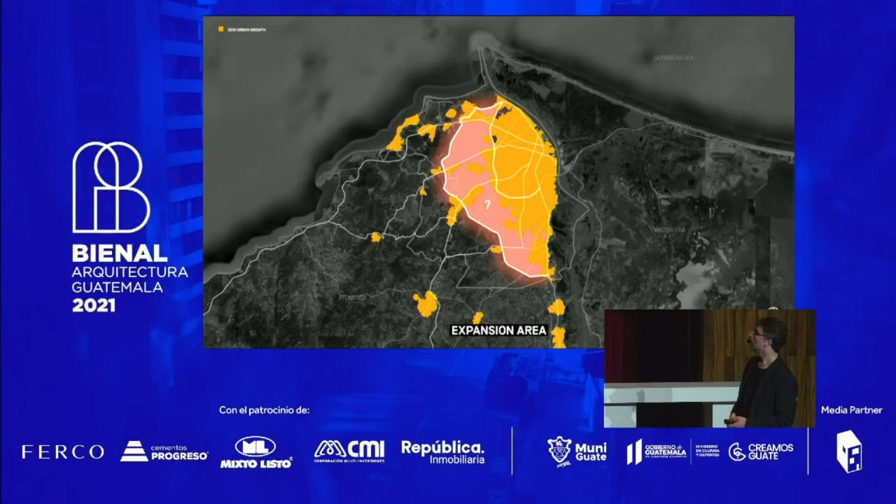And the study that we did was commissioned on the occasion of the second ring road here in the dotted line being built. And the governor and the mayor of the city knew that this would mean that there would be a lot of development in that area between, and wanted to understand how to make a more balanced city.

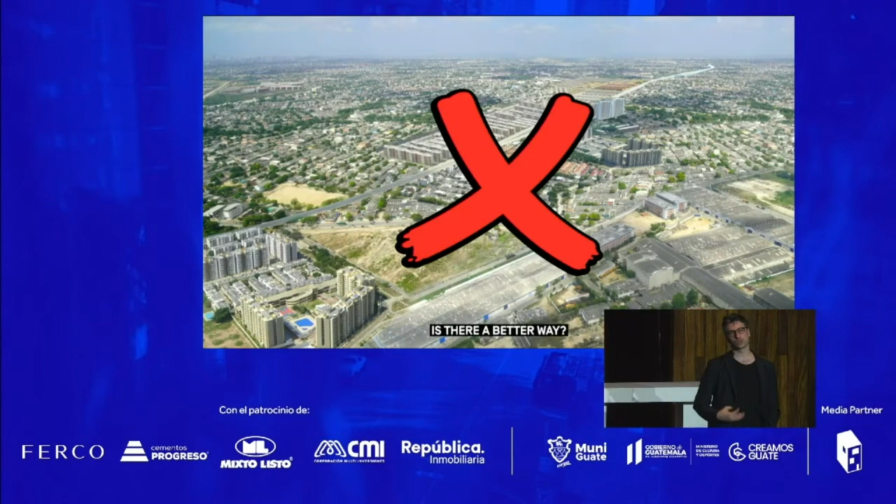Even though the land looks like it's virgin, it is all owned by someone, so very fragmented land ownership. And with ad hoc development of the type that's typical in this area, you would eventually have complete sprawl. So the question was, what can we do in advance that can allow the city to grow, but also create value and amenity within the city?

So, as with a lot of the projects that I talked about previously, we started with the people who live here, taking a scan of all the municipalities along the length from Puerto Colombia, past Barranquilla to Galapa, Malambo, Soledad. And the brief was really, how can we take this series of municipalities, which historically have been separate, but that are beginning to work as one, and create the first metropolitan plan for a city in Colombia?

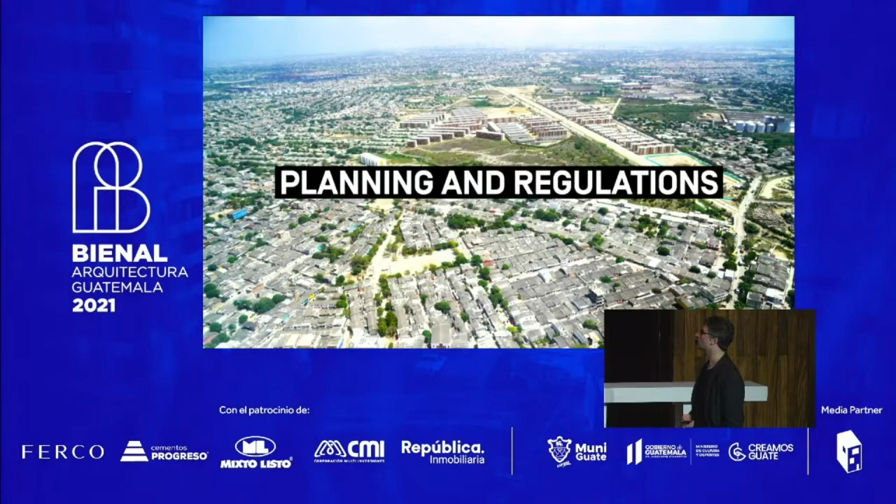So we did an exhaustive set of site visits and studies looking at a number of issues that are quite specific to Barranquilla. One that's very important is that it has the second largest carnival in the world after Rio. And it's a big part of the identity of the city.

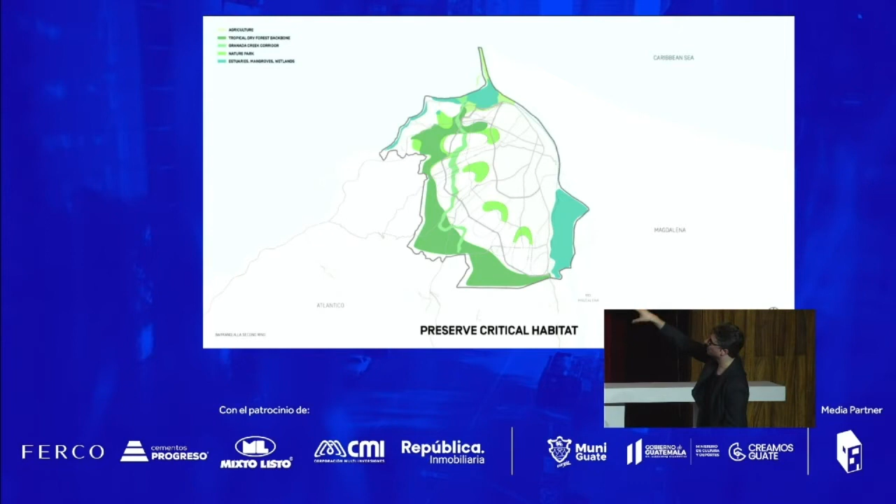Our spatial framework sort of started with nature, looking at areas recommended for preservation that are critical habitats, either because they're riparian, meaning adjacent to water, or they're important clusters of dry tropical forest. The one in the north helps buffer salt winds from salinating the soil. We formalized those areas into a green band on the exterior of the city, and then a series of green hearts between the second ring road and the existing core of the city.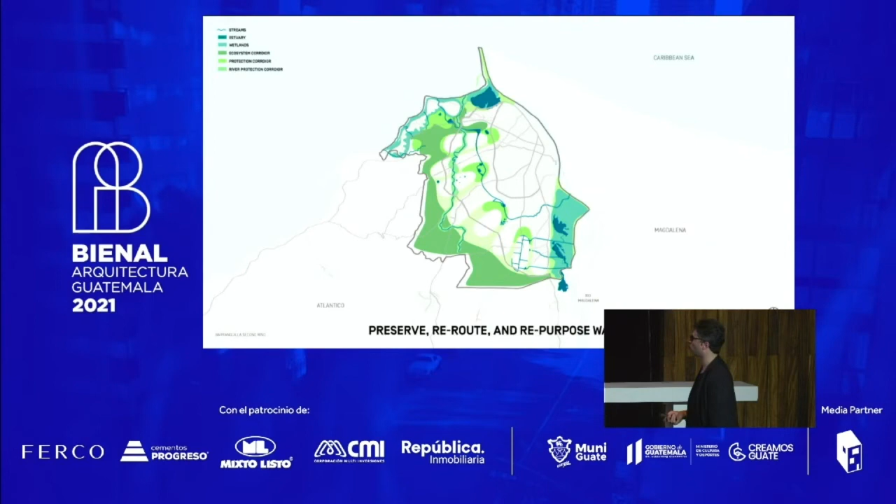We connected them with a series of biodiversity corridors, which, whenever you have patches and connect them with corridors, you end up with a supercharged habitat. Irrigation is also important here, given it's a dry climate with less and less water in the future. So we're diverting a small percentage of flow from the Rio Magdalena through a new canal, the Arroyo León, which irrigates the central parks there.

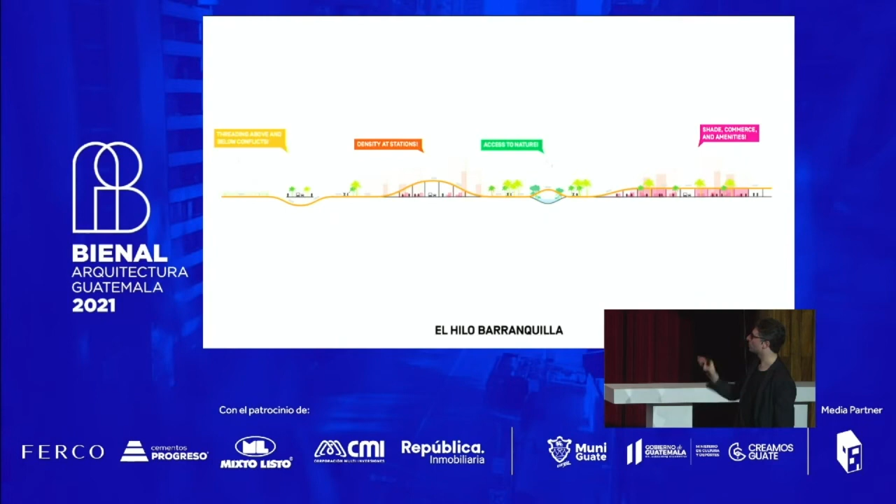Connecting the new territories together with the old territories through a loop that circumvents trying to get through the dense fabric and gets you from anywhere in the city to anywhere else within 45 minutes, going under and over conflicts to stay efficient. We called it El Hilo, the thread that links Barranquilla together.

And then back to the New York observation of making sure radial grids or radial mobility patterns don't stay radial, but that we really try to make them into grids, creating a grid where at the nodal points we have an average 10-minute walking distance from transit, which leads to this pattern that we see here.

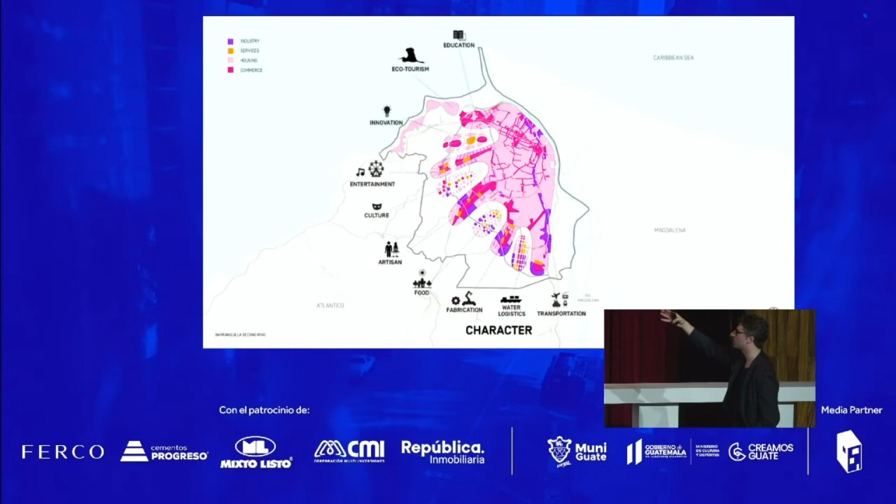Also thinking about leveraging some of the existing strengths of the municipalities along this length: education and innovation in the north, making and production in the central areas, and logistics and distribution in the south. And just a sense of what that fabric might feel like.

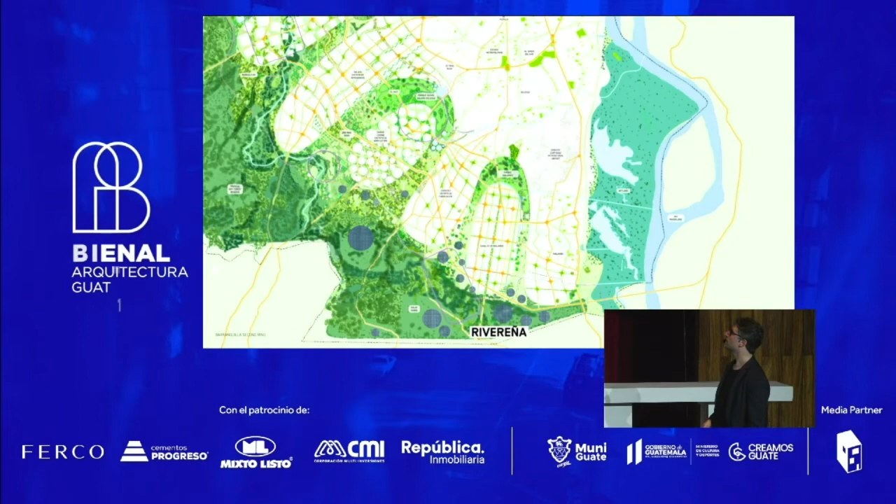The ecological areas are also not completely preserved. There can be farmland, energy production, very low density housing. But this is an effort that the city and metropolitan area will undertake to ensure connectivity of green between the exterior of the city and the interior. Here are some of the corridors created through that plan.

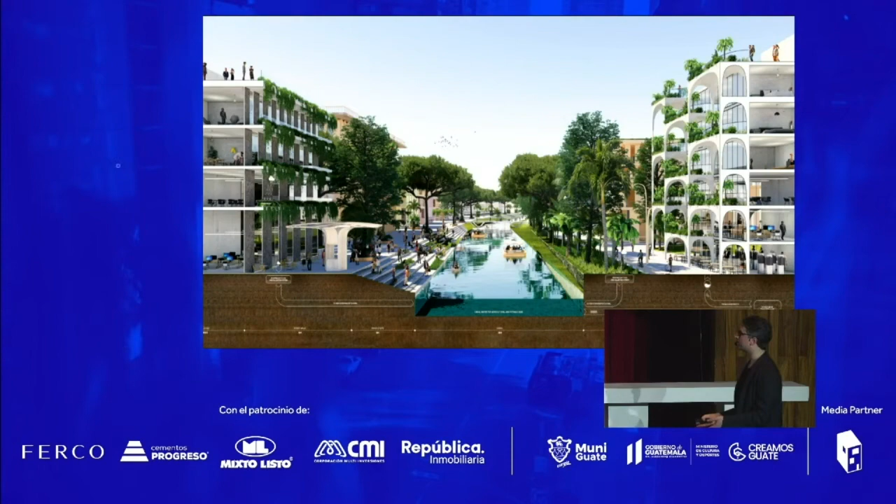So this is that weave of green in one of the central parks of the city. The Arroyo León, which is both irrigating the new territories, creating value for adjacent real estate, and also serving as a stormwater reservoir, because Barranquilla has very intense rain events when it doesn't have drought.

And then thinking about new transit-oriented development with El Hilo there, looping along the waterfront in the post-industrial areas along the river's edge.

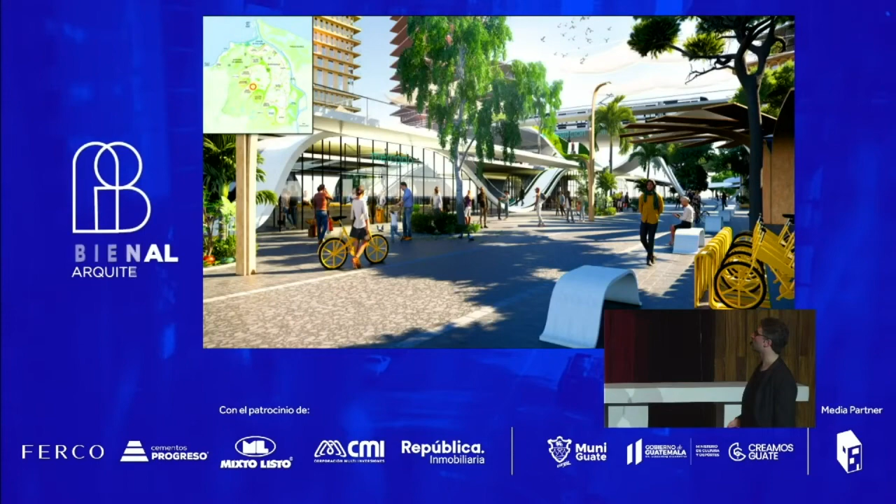So we expressed this with the vision of a day in the life of a Barranquillan, starting off in mixed-use housing with a close relationship with the street line. Dropping her kids off at daycare by a bike station in a central plaza, having a safe, dedicated bike path taking her from her local neighborhood plaza to the larger transit plaza, transferring to the Hilo, where she has a 20-minute ride to her place of work, which is in one of the new territories in the north.

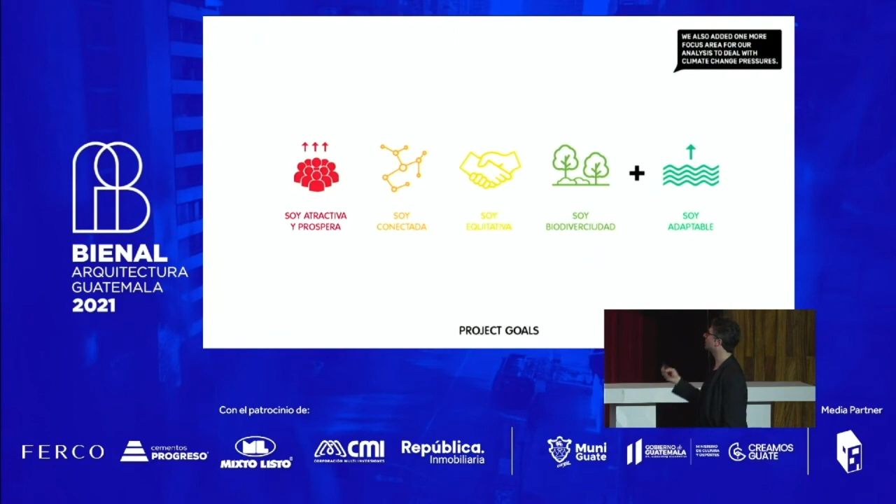We completed that just before COVID, and since then we've been working with the mayor, the new mayor of Barranquilla, to take those same principles and apply them to the existing city, doing a more tactical and strategic plan for the growth of the city itself, the densification and improvement of parks and other things, working with the goals they've already been pursuing, adding climate change as a major issue.

And really focusing on climate change here because, indeed, with current policies, there are a lot of indications that climate could go up by 2.7 degrees Celsius if nothing is done. The Paris Agreement has us at 1.5 to 2 degrees. And just for a sense of scale, if we hit 5 degrees, it's essentially the end of human civilization. So this is a key input as we continue our work there.

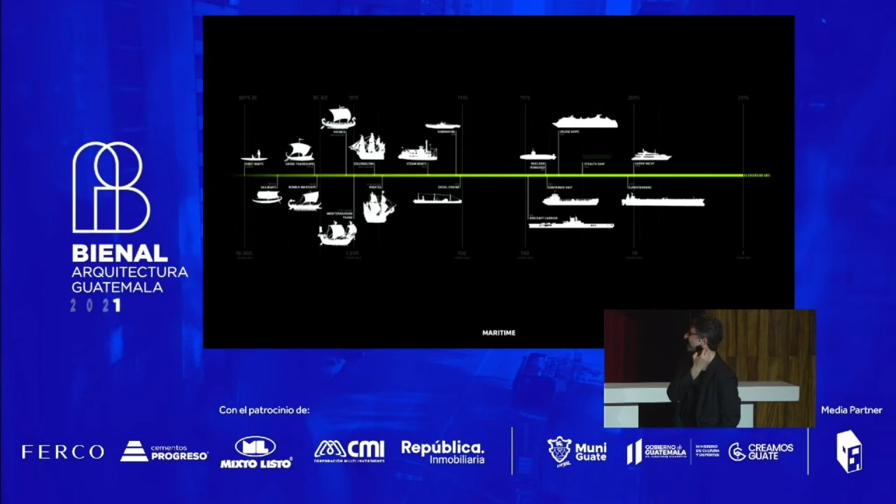And then I'm just going to finish off with one last project, which, to end a talk on urban mobility, I think I need to hit. That is a project looking at one of the newest technologies of mobility being examined right now. In boating, there have been improvements over the years. In air, in rail, in cars, not quite as much. And so the Hyperloop, which is here all the way on the right, is a technology which, in this presentation, a lot of the discussion has been about mobility within cities. But in terms of intercity mobility, Hyperloop does have the potential to reduce travel times quite a bit.

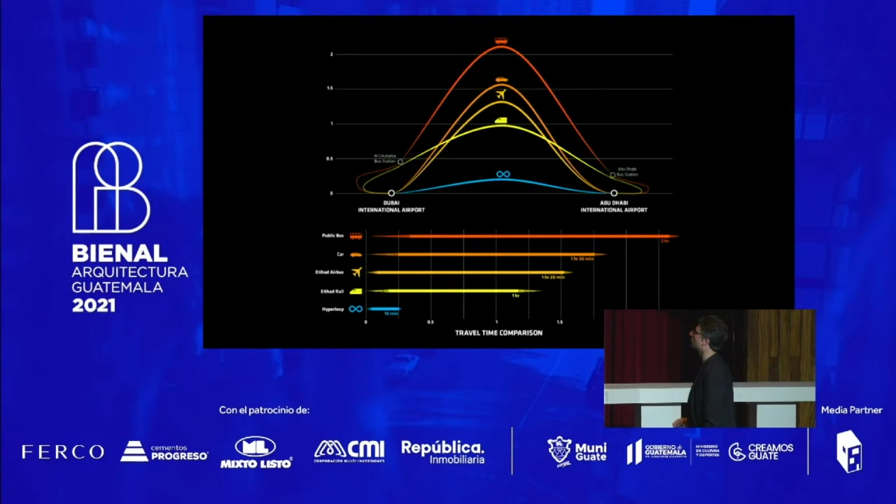Just for a sense of what an even more future-forward mobility experience might be, I'll let this roll. This is work we did with Virgin Hyperloop One.

So this is really about making those transition moments, those intermodal moments, much more seamless by actually packing one mode, the private car, into another mode, the collective pod, which then gets sent at high speeds via the tube, cutting commutes that might have been hours into minutes.

So you could ask, okay, that's great, but what does that matter for Central America or other parts of the equatorial globe? We have a project going on right now that we call Master Planet, which, as absurd as it sounds, is actually looking at a master plan for the planet to get to net zero. There have been a number of themes we've been exploring through that, one of which is transportation.

So I just want to end here with a little bit of a moonshot idea, which is that a lot of the accelerated GDP growth and population growth is in sort of areas of, let's say, the New World.

When you look at the way that connections might be made across the globe for the most efficient path of a sort of global loop, you find something like this loop winding its way through unexpected places, through Central America, for example, and Guatemala, through parts of Africa.

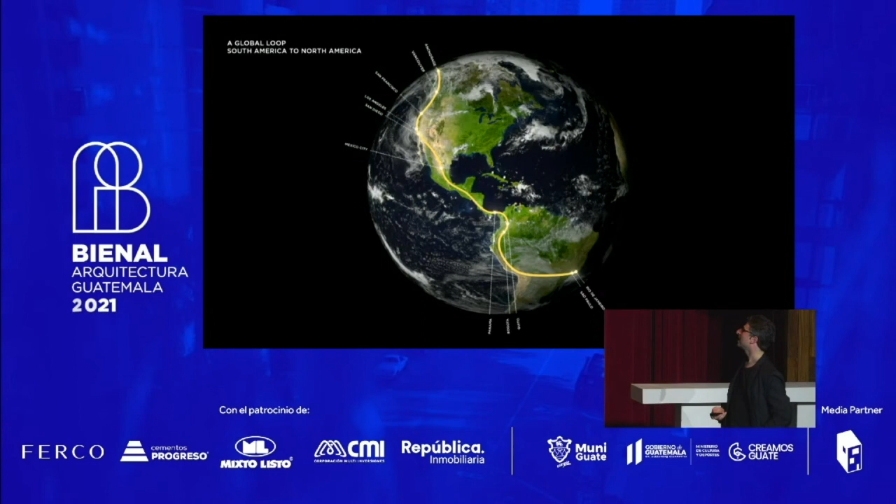And if you then also start thinking about this combined with a more global energy distribution system, water sharing, all these kinds of things that we're going to need, it actually sort of turns the way we think about geoeconomics and geopolitics a little bit on its head.

So I just wanted to share this as a sort of a what if, and I think it's these kinds of what ifs we should be thinking about as designers every day.

So I'll close here with a quote that Bjarke loves and that we think about a lot in the office, which is that the future is already here, it's just not evenly distributed. That's by William Gibson, the author, in 2003.

And I think that cities are really where those innovations are going to happen. It's also where a lot of the biggest challenges are going to be faced. So I'm really excited to be a planner today, and that we have something to contribute to society. And I'll end it there. Thank you very much.